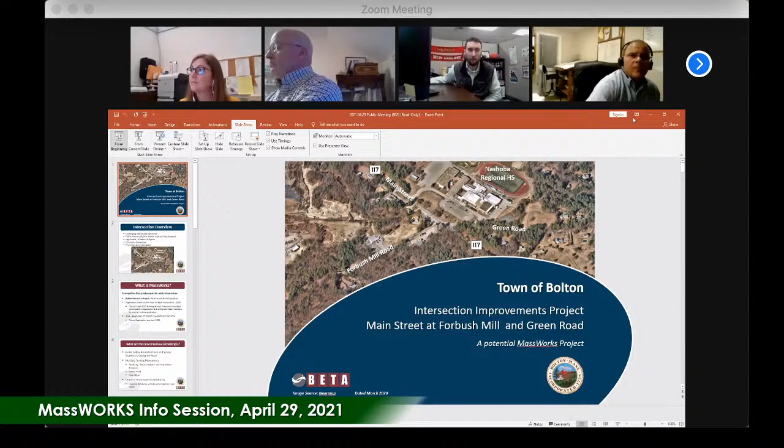You can go right to the next slide, Jenny, that'd be great. Randy, are you seeing the side panel, or have I removed it in the view you have? I'm seeing the main slide plus the next slide. Okay, so I do need to swap. Hang on one sec. Is that better? That's the same... actually, no, for me it works. It's still in presenter view, Jenny. If you can do the display settings and swap the two screens. Yeah, I just did that. Is it correct now? No, it didn't change. I'm going to stop the share. Worked in our test beautifully, didn't it? It did work, yeah. Did you make Randy the host though, Jenny? I tried switching, I could not. No, not yet. This goes to my statement that this whole Zoom platform can be cumbersome. All right, I think this is going to do it. We're good now, right? No, it's worse on my end. Just kidding, I mean, now. Try to switch it again. Try to swap the screens again. I've got it open on my computer, Jenny, if you just want to let me share my screen. Not sure why that's not working. Let me do one more thing, let me just click and drag. So happy that Nikki is live streaming this gaffe. This looks good, you could see it now? Yep, looks great, all right. I don't know what I did, but I think you're sharing my screen.

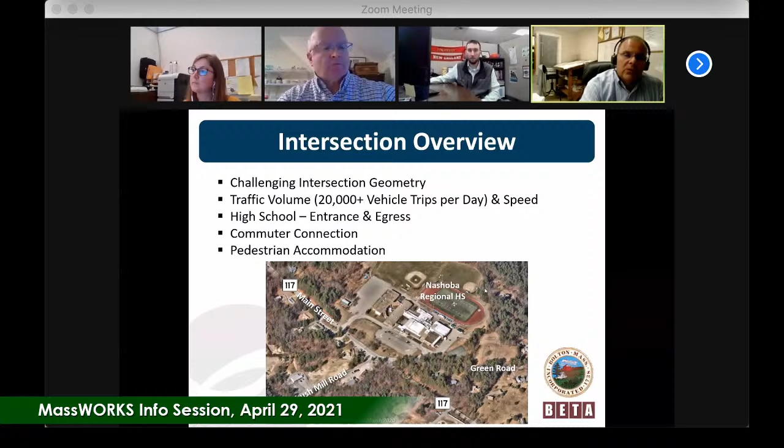117 is obviously a commuter connection for people to meet up with 495, and pedestrian accommodation is virtually nil at this current intersection. There's no sidewalks, no formal crosswalks, no other means of protecting pedestrians coming from the school across the street to Classic Pizza, or people walking down Forbush Mill to the soccer field.

This project is part of what we hope will be a MassWORKS project. MassWORKS is a competitive state grant program utilized for public infrastructure. We did have one recently completed successful project—that was the Main Street at Wattaquadock Hill Road project, which was funded entirely through the MassWORKS program.

A preliminary application for this intersection was submitted back in 2020, prior to my arrival in the town, and it was reviewed by the state but did not make the funding round at the time. Myself and the consultant met with the state reviewers and participated in an application debriefing, learning ways to bolster the application for a future round. Earlier this year we submitted a letter of interest to the state, and our formal application is due in early June. That's pretty much the reason for this informational meeting tonight.

I think everybody knows the concerns, issues, and challenges with that intersection: public safety for pedestrians and school students crossing the road—again, virtually nil—and multiple turning movements that occur in a very short area.

We have the roadways—Main, Forbush, Green, and the school entrances—plus conflicts with the parking lot and people coming and going to Classic Pizza. To the further extent of our project, the western end is the entrance and exit of the post office, which sees relatively constant traffic in and out. There are other businesses in that complex as well, but the post office is probably the largest volume of utilizers.

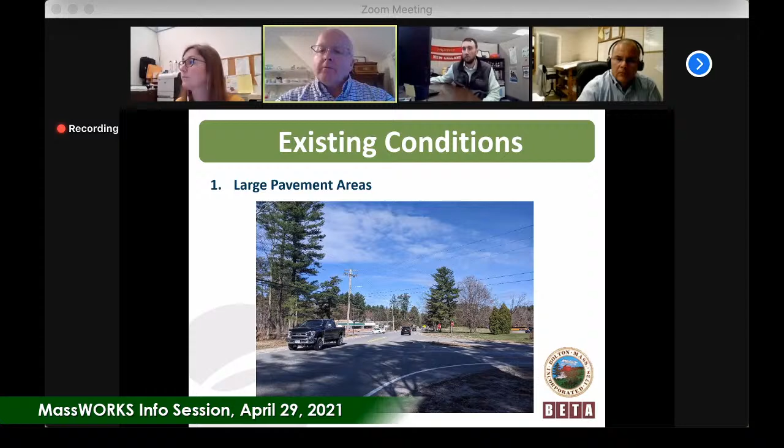As Randy had mentioned, there are a number of curb cuts along the roadway, almost continuous. There's very little edge treatment, vertical curb or slope granite or anything like that to designate lane and geometry along the roadway.

We have witnessed and heard of lots of people traveling eastbound, and someone is waiting to take a left onto Green Road, or someone slowed down traveling eastbound, and they'll almost drive through Classic Pizza's parking lot to make their move to turn right onto Forbush Mill Road. We would like to try to slow those drivers down a little bit and control the way they access the two side streets.

As Randy mentioned, there's a total lack of accommodation of sidewalks along the roadway. There's no bike accommodation as far as a designated lane. Anyone who chooses to ride a bike out in this area would be riding in the lane with vehicles.

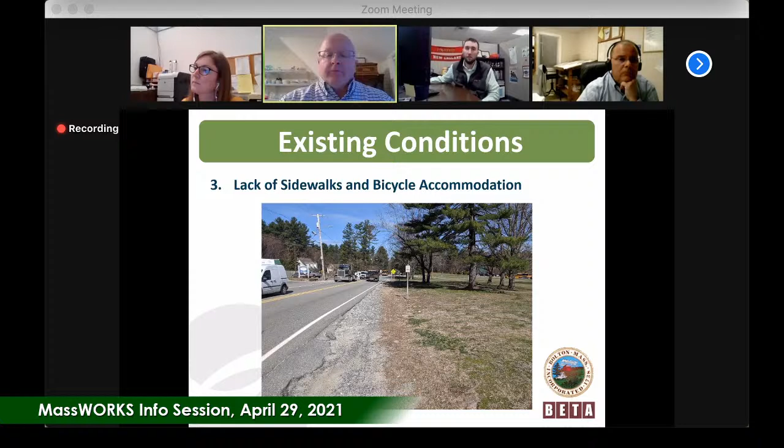That may occur at certain times. I know in a lot of towns, early Saturday and Sunday mornings, there are people who get out very early, 5 or 6 in the morning, and bike. But beyond those times, it's rather difficult to be a bicyclist along the roadway. Putting bike lanes and even segments of sidewalk here is not going to solve the entire problem, but it's going to start providing for the future, where if the rest of the corridor is considered, it would provide those links and allow us to construct that infrastructure now.

With the lack of sidewalks, we have a crossing here that comes from the school. It's used by kids getting over to Classic Pizza. There's no crosswalk in the roadway, making it a difficult crossing. We met with the safety officer for the school, who told us there are a number of kids who try to cross here, and it can be difficult for them, mostly because of the speed of vehicles coming down 117.

From that, I'm going to have Tyler DeRuiter explain the two concepts, the signal and the roundabout, and some of the differences and advantages of each.

Hi, thanks very much again. For the record, Tyler DeRuiter with Beta Group.

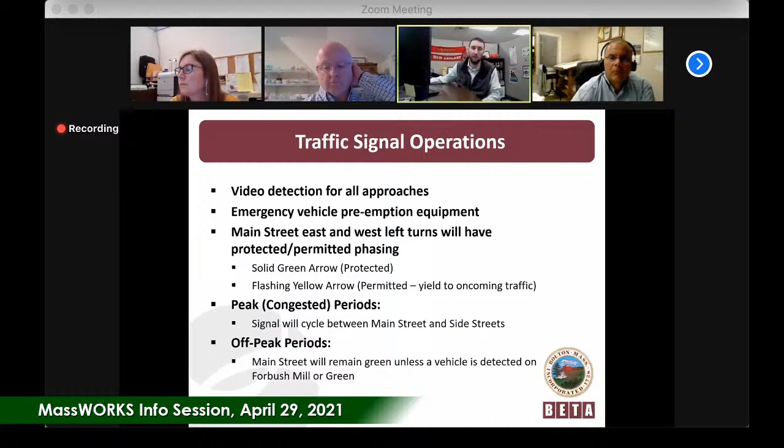Advantages and some challenges here. The obvious advantage is it makes it easier and safer for side streets to access Main Street. Currently, there's a stop sign and vehicles have to wait for a gap in the main street traffic. That's where you see some conflicts, where with heavy volume, people are jumping out and taking maybe a shorter gap in traffic than they should. This will give them a green light to go and stop all main street traffic in the process.

The emergency preemption we talked about, and then an exclusive pedestrian phase. This would be when you push the button, all approaches stop, the pedestrians get the walk signal, and then they can go. Currently, there are no crosswalks and no pedestrian phasing here because there's no traffic signal.

The challenges are primarily the alignment. As Randy mentioned earlier, Green Road comes in at a skewed angle, which makes it really tricky for trucks and buses to make turning maneuvers. We're improving that by shifting the road over, but Green Road still is a skewed angle, so that will continue to be tricky.

And then also the opposing left turns on Main Street. Because of the skew, the two left turns to get to Forbush Mill or Green Road would have to cross each other from the left turn lanes. This means we can't have those two left turns go together as a protected phase like you might see in other parts of town. The skewed angle also increases the length through the entire intersection, which generates long clearance times, your yellows and reds. Coupled with that is the speed, which also increases those.

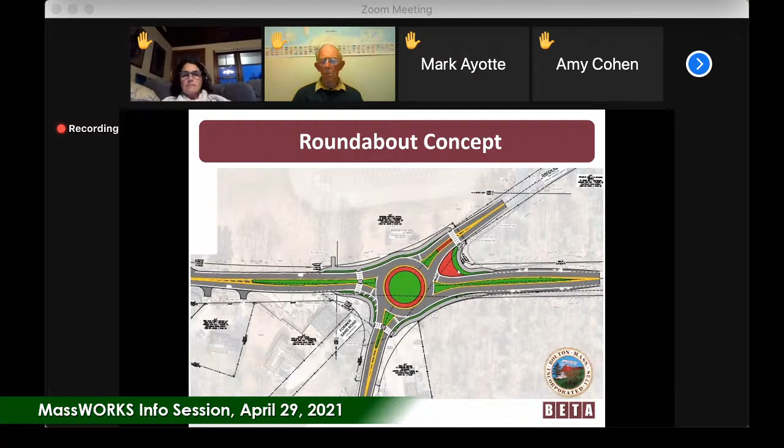I think what the gentleman is talking about is the potential interaction between cars heading west on 117 and their interaction with people coming around the roundabout to go up Green Road. Correct me if I'm wrong. I'm really concerned that folks are going to come up to the intersection, these people 117 westbound, come up into the roundabout and are going to be anxious to enter the roundabout, and could potentially squeeze folks who are trying to head almost in their direction.

Got it, it's kind of that acute angle, a funky, not quite right turn. And they're going to be squeezed by cars trying to enter into the roundabout from 117 westbound. That just looks bad to me. I don't know how you fix it. But okay, thank you. Tyler, I don't know if you have a comment or any thoughts initially.

These plans here are very preliminary, conceptual at best. So personally, I think that's a valid point. I get the same feeling heading west on Route 2 at the Concord Rotary, where cars want to take that first leg off of the rotary - it's a real tight situation. But I totally get what you're saying.

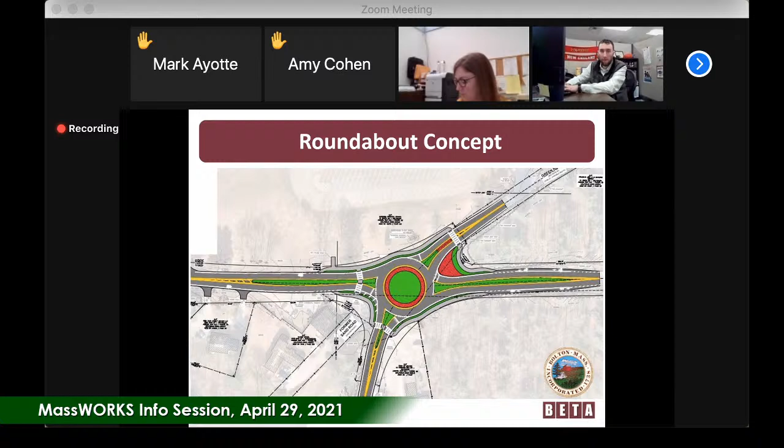Nice to see Classic Pizza cleaned up a lot, the entrance there. I remember way back when they were in front of the planning board, must be 25, 30 years ago. We were supposed to put something in there to stop eastbound traffic cutting through the Classic Pizza parking lot to get into Forbush Mill Road.

But right now the parking is working out into that pavement area. So a little bit concerned with that westbound side of either of them.

Suggestion maybe on the crosswalks that you've got there just west of the roundabout. A good thing that works in England particularly - and you can guess that 50 years ago that's where I came from - they offset the crosswalks.

So that you basically can't run through both of them. You've got to make pedestrians stop in the middle, cope with the offset, which is often fenced, and then treat the other crosswalk on the other side as a completely separate transaction. That works very well.

Going back to my experience of England again, they found the volume going through some of their traffic circles, of which there are thousands, is so high. And going to Krista Mear's point about being squeezed out, if you're trying to make a left turn into Green Road, same thing goes on with the Concord Rotary. But it seems to work okay.

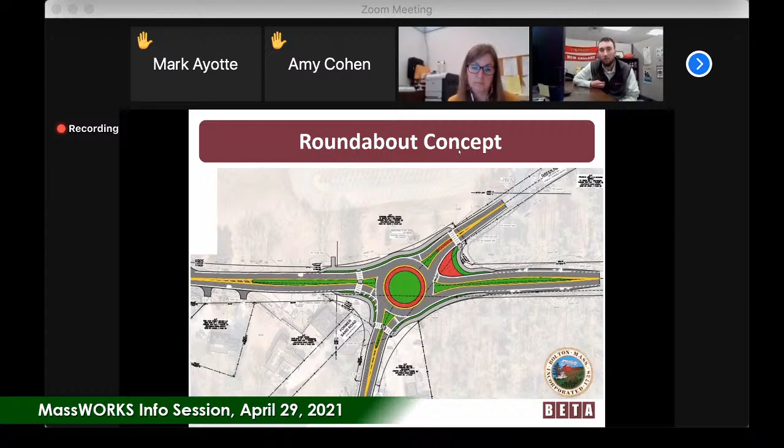I really applaud you taking out the left turn lane for people coming out of the Green Road entrance out of the school. A lot of them take that left turn to get across traffic and go eastbound. We have to remember that, being a regional school, a third of the traffic comes from Stow and a third comes from Lancaster. So there's school in and out time, and other times in the day there's school traffic from both directions.

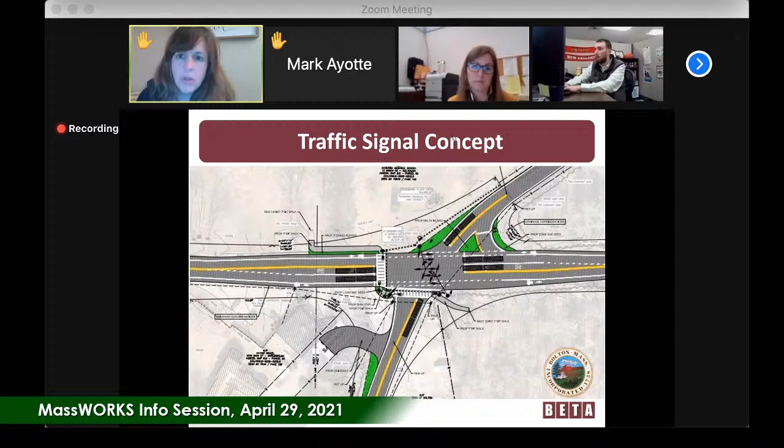Yeah, thank you very much. My question is more about whether you could speak to the timeline for when this project might occur if we were to get the grant, and how the decision is made. I sit on the school committee and the school building committee, and we're currently in the middle of a process with the MSBA to look at options for improving the high school, or making a new high school. So I'm interested in how the two of those impact each other.

So we did meet with the school, and I believe the superintendent—I'm not sure if he's just a principal, since it's a regional school and I'm not sure I'm using the right term. He informed us that you were in the process of looking at the feasibility of a new school and what it might look like. We discussed how traffic might change if that happened, and he did not feel it would change. So we were pretty confident in looking at things the way that we have.

As far as the process goes for MassWORKS, this year's schedule has been moved forward a little bit. I think they've done that because in prior years they used to announce somewhere around October, around election time—there used to be a common time to announce—and other times it would go as far as Thanksgiving. But all of that kind of put people into a real rush to get together a spring construction job, so they have brought that timeline forward.

As Randy said, the deadline for submission is June 4th this year. They plan to make awards in early fall, which would allow the design to continue. With an early decision, we would be able to put together a design package in the winter, award a contract for the spring, and be able to move forward.

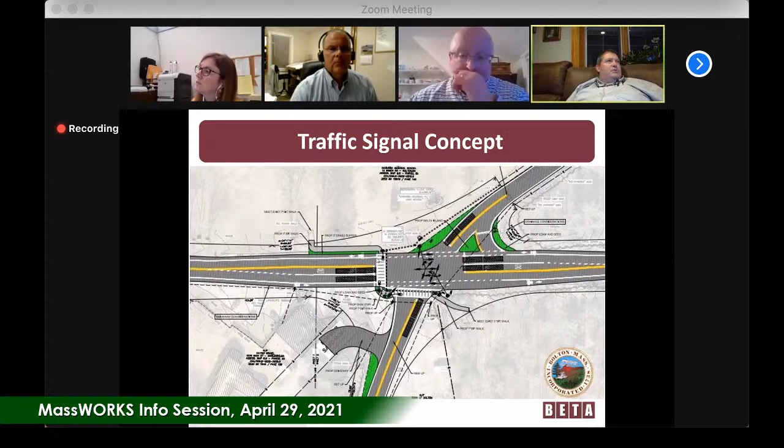Go ahead, I have a couple of follow-ups that came up. One is on a gentleman before mentioned on that westbound lane, maybe widening that so it's easier to turn in and out. I think that's a good idea for the businesses on the westbound side of the roundabout. I was thinking more of the roundabout situation, just to give them a chance to get out of the way. It looks like we have some of the room that we might need there.

We do own, the regional school district owns the other property. And I think if we can make everything safer, they might be willing to help give a little of that front lawn that probably isn't going to be used for anything to this process, I would hope.

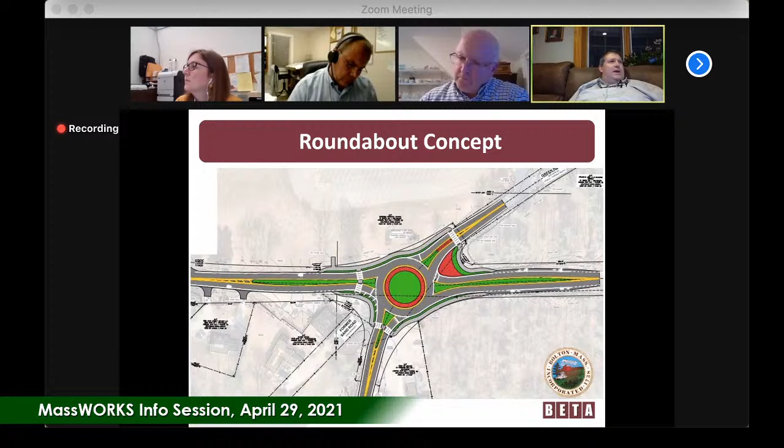The other thing is, I know we had talked with the previous DPW director, or public safety, that this area could be some sort of traffic business zone safety area. I forget what it was called exactly. We may have called it out in our report, or it might have come up after the fact, but it was something that could be applied to this area because of the number of businesses lined up in a 45-mile-an-hour area that qualified it for an automatic kind of speed reduction because of everything going on in the business area. So that might be something to look into on the speed side.

Regarding the access into the business, certainly something we need to continue to consider and work on. I'm not sure that we would need property from the school to do that, but I think they might be a willing participant if that did arise.

Tyler, I believe what Mark is talking about is the changes to the school zoning type regulations that allowed for certain types of districts to be speed zoned differently. Would you be able to address that? I don't believe I can.

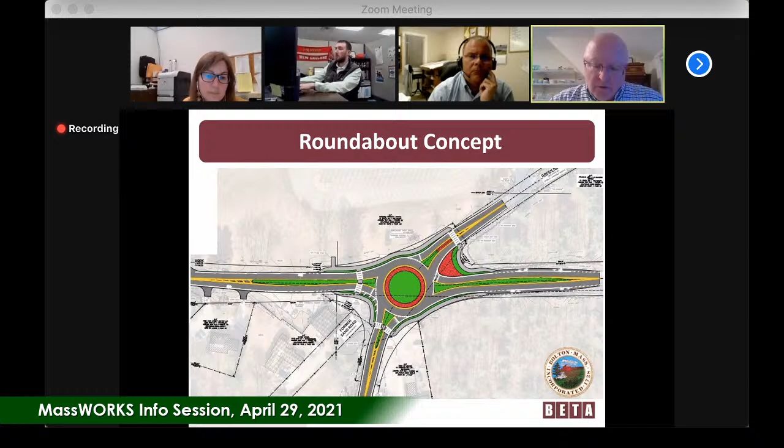Okay, well let me address it a little bit then. So there were changes made. There were always school districts that had to meet criteria in order to get signage put up to identify a school zone, reducing the speed down to 20 miles an hour. There are different signs used when children are present during school hours, flashing signs, things like that. Through this change in the law, other areas or criteria were designated that would allow for speed zones to be changed.

I'd have to go back and read the law regarding the density of commercial businesses. I'm not sure that's one, but I do know it did apply to other areas, such as a cluster of housing, maybe elderly housing, or other activities where a park might be present. So we can check that law and work with Randy to see what might be required to go after it. But that's a good suggestion if we could meet some type of criteria like that.

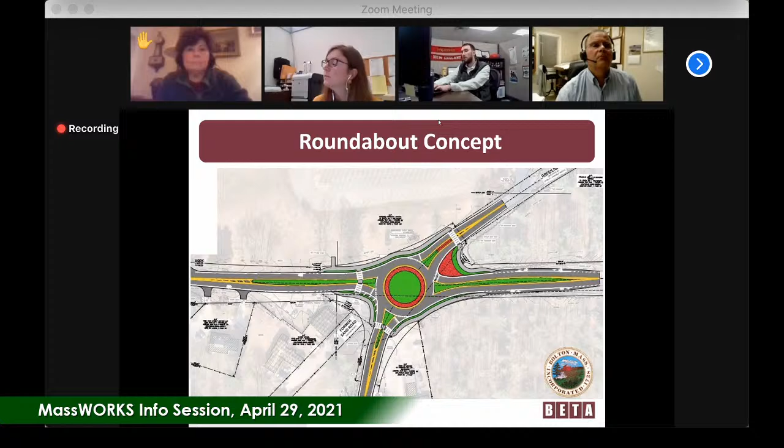And one other comment on streetlights versus roundabout. I have not almost been hit crossing the Kelly Square one, but crossing right in front of the park just two days ago, I almost got run down by a car going 45 miles an hour trying to either beat the light or running the red light, and I had the walk signal. So no offense to all the great design work you guys do, but a lot of times nobody really pays attention to those walk signals, especially on a road with some speed going on. I found them to be pretty much useless, and drivers will run a red light, and if you're not watching, you'll almost get clipped.

I almost wasn't watching, so that's it. But thank you for doing this, Randy, and welcome on board to Bolton, nice to see you.

Thank you, Mr. Hyatt. I'm going to go now to the stars that submitted a couple of questions. The first question they submitted says, for the traffic light option, would the speed limit on Main Street be reduced?

I think that was pretty much addressed in a question that Mary had earlier, and I think Tom has addressed it a couple of times, and it just came up again with Mr. Hyatt. I think that's something we need to do further research on and review the current changes to the law. That was a great discussion we've had this evening.

The second question says, if you are considering the post office, you need to consider Goose Pond Road. Also, the speed limit at 110 is reduced to 30 miles an hour prior to the lights.